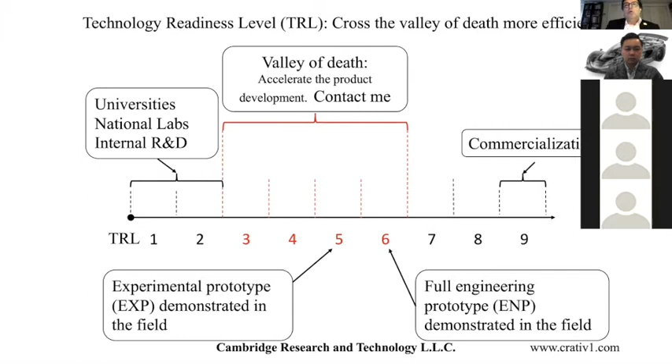Now, personally, I have had the opportunity to work on several projects in which I was able to use 3D printing. Here we have 3 cases. One was related to the design of autonomous underwater vehicles. Another one was related to gas turbines, and another one was equipment for oil and gas exploration. In the first case, I found that using 3D printing was going to allow us to reduce by almost 2/3 the length of an underwater vehicle that we were designing. And I was very surprised that at that time, about 3 years ago, we could print some components in 17-4 steel, and that was a key enabler for implementing that design.

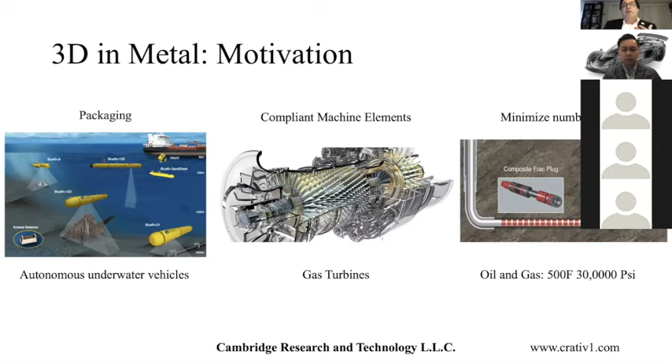In the area of gas turbines, there were a number of problems they were having, and I found that machine elements that were compliant, in the sense that they were elastic, were feasible only by using 3D printing. Feasible in the sense of manufacturing and cost. And also, I have explored the use of 3D printing for components used in oil and gas exploration that can withstand 500 Fahrenheit and 30,000 PSI. So I will leave it there, just to let you know that I have professionally worked with 3D printing, and I have found it to be a quite viable engineering solution.

Now, I just want to remark that there are 3 aspects of aluminum, which is the material that Simon will focus on today: number 1, it is abundant. It has a very high capability for being recycled, and it is both light in weight as well as strong. So Simon, you have the floor now.

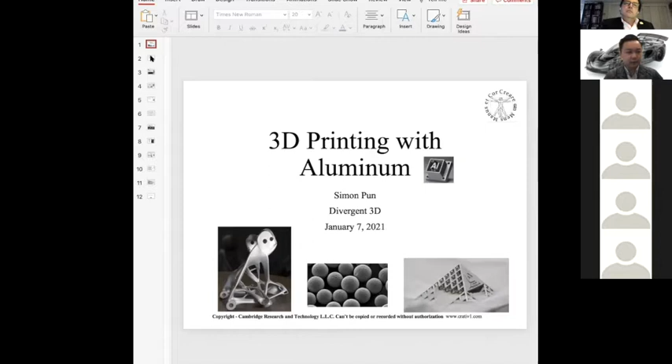You may hear me reference an article called "The Confessions of a Capital Junkie," written by Sergio Marchionne, throughout my presentation. Sergio Marchionne is the late chairman of Fiat Chrysler Automobiles, who really took a hard look at the future of manufacturing, particularly in the automotive sector. From his writing, I learned to provide upfront what the presentation is about and not about.

So here it is. The goal is to simply provide insight on the state of the art. Like Julio shared, this is a colloquium. We're among friends and the like-minded, and it's a platform for us to share. I was inspired by Sergio Marchionne to make these confessions and share with the community where I see the most pain lies. What this is not about is a sales pitch. I'm not selling anything, and I'm not trying to make a recommendation for which material or which vendor to use.

What this is really about is why aluminum is important, giving an overview of the landscape of 3D printable aluminum alloys available to the market today, and then showing a user case on proprietary aluminum alloys.

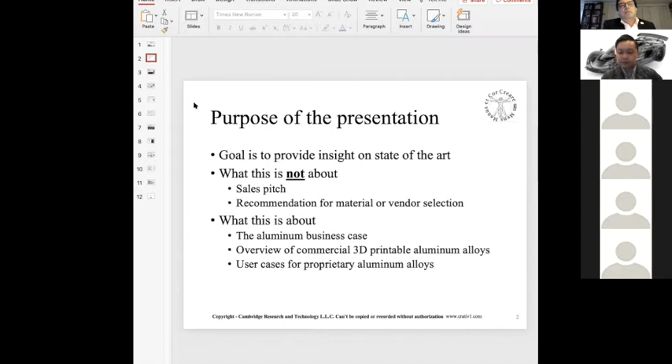So with that, shameless plug here. I understand that there will be a Q&A discussion at the end, and I'd like to be as useful as possible answering any questions. So just a brief introduction of my background. I'll start from the bottom. I became really interested in academic research even when I was an undergraduate at UC Irvine.

Eventually, I pursued a graduate degree in material science. I started out with aerospace engineering over at UC Santa Barbara, where I had an opportunity to work on new materials for a nuclear fusion reactor design. This is the tokamak. Apologize if it's too small, but the empty space looks like a donut here. So my research group was responsible for creating the first wall material, where the material sees the first reaction of the fusion. So high temperature material.

Then I actually got my first exposure, first taste of 3D printing when I was R&D staff at 3M. There I was given a third hand, if not fourth hand, binder jet printer to first fix up and make it work and print with 3M's proprietary ceramic material at the time for dental applications.

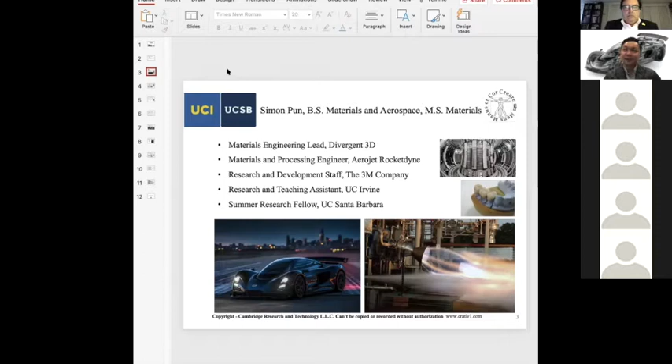The second is its recyclability. According to aluminum.org, aluminum is 100% recyclable and sustainable. A perfect example of a circular economy where we strive to achieve zero waste and minimal impact on the environment. Also, the aluminum recycling infrastructure is very well established.

Personally, I would say that the 100% recycling rhetoric from aluminum.org assumes that we'll forever be using aluminum cans. I read their life cycle analysis and why they claim 100% recyclability. The assumption is that all the scrap metal from cars, from planes, from other applications, consumer electronics, all boil down to aluminum cans, which we use for beverages and others. But the assumption is we use cans forever. Hence, it's 100% recyclable.

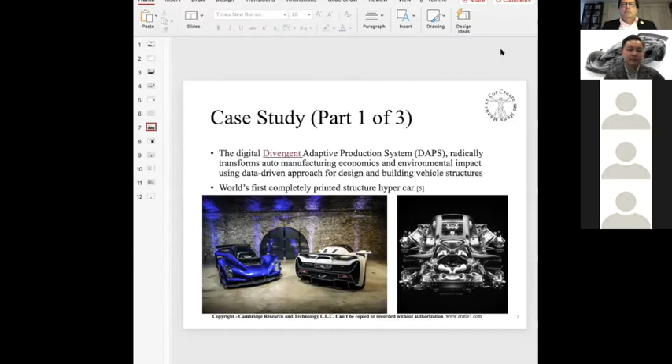What I'm most proud of is with my team, the past couple of years, we were able to work with our structural vehicle integration team to understand some of the pains that they are experiencing. So in the next slide here, I wanted to just show a quick method of what made us decide to create our own material. And in the next slide after this one, I'll show you some knowledge-based models on how we did it.

So here, the first step is to define design requirements. So we work cross-function with the auto structures team and the vehicle integration team to understand, to truly take advantage of generative design and 3D printing and be a pioneer in the field, what are some of the most attractive, and to them, the low-hanging fruit, to make us truly pioneer and proprietary. And basically, there are three requirements that we boil down to: crash-worthy.

Like I said earlier, we want to be able to 3D print a part from our printer, remove the support structures, depowder, and quickly be able to assemble that in our vehicle, in our structure. So I won't get into the specific numbers, but the high ductility, typical aluminum strength, energy absorbing for our crash bumper, our side bumper, our back bumpers. So we boiled these requirements down to a specific yield strength, tensile strength number, elongation, and energy absorption.

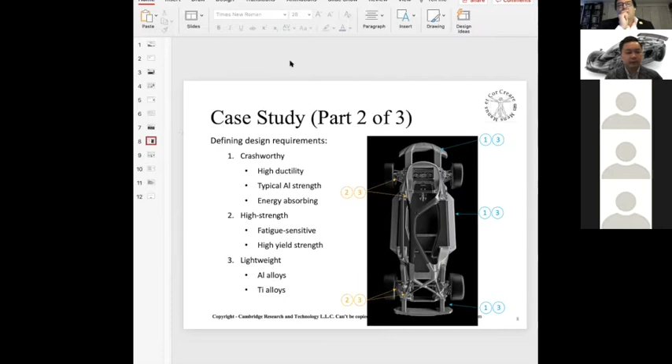We've published in 2017 that we use aluminum alloys and titanium alloys for lightweight purposes. But you might be able to guess that with our growing materials team and some of the success we've had, we're trying to go towards all aluminum, wherever it makes sense, because titanium does have a much higher stiffness than aluminum. So in some parts we may still consider titanium, but aluminum's cheaper, and in automotive, cost is very sensitive. So we're trending towards aluminum.

So a little bit of what my team did was coming up with a governing model when we're making these from-the-ground-up new materials. So let's take a high strength requirement, for example. We would build a material model and validate the model's accuracy using tested data. And then we would refine again and again until we're satisfied with the prediction accuracy. So we have here in 3 steps, creating and validating the governing model.

With this model, with our understanding, we survey the periodic table for solute elements, and then we would optimize our process parameters to first see if the material is printable, and if so, we go through a design of experiments to make sure that the parameters are producing the right microstructure that gives us our properties, and also its production rate. So going back, just looking at the governing model piece, the fundamental strengthening models are used, like solid solution strengthening, precipitation strengthening or dispersoid hardening, and grain boundary strengthening models.

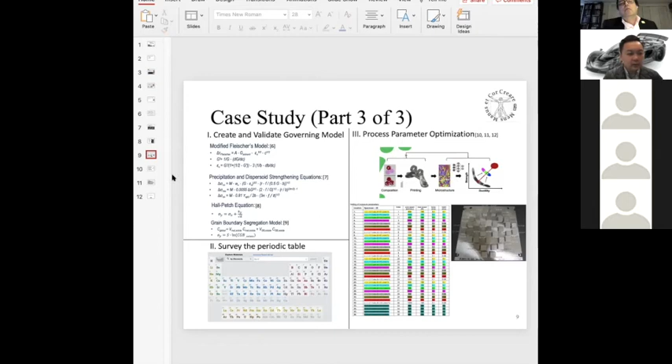So I'd like to leave the group here, before we go to open a discussion, some predictions that I have. Actually, the first one is not new. The growth of proprietary aluminum alloy development will continue in automotive for multi-material body purposes. I think the first institution that coined the idea was the Fraunhofer Institute in Germany. A long time ago, they proposed a multi-material body concept, and they actually succeeded in making some prototypes using steel and aluminum and titanium body material.

But recently we saw that Tesla also came up with their own proprietary aluminum material for die cast purposes, and their pain point was that the traditional, I think, A356, is the aluminum alloy that they were using. It's not conductive enough for them because they're EV, so they create their own. And with the adaptation of 3D printing and trend of EV, I'm predicting that there will be more of this type of activities going on. This is a patent just published by Tesla in February 2020. So we can expect to see more of this.

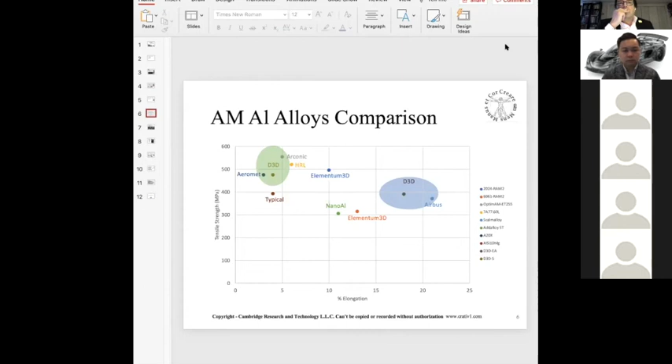But aluminum is a very big business, and now we're doing similar things to Simon's work. We were evaluating and helping the companies producing those high-strength aluminums. We develop their parameters and try to industrialize their material. It's extremely challenging. Very, very interesting. So Simon, maybe you want to share some feedback about what Yuping has just said.

Yeah. Before we were motivated to create our own material, we were also sourcing a lot from some of these startup companies that I'm showing on screen now. And there are two big, I would say, barriers. One is, like you described, process parameters were very difficult, and depending on the expertise.

I'm hearing some news in the background. Yeah, somebody has a radio.

So yeah, process parameters depend on how experienced one is with the design of experiments for aluminum. It takes some practice. It certainly was the case for us. We took a lot of practice to really hone down on the right process parameters that would suffice in terms of build speed, but also material integrity. We've found that if we want to build with a higher layer thickness, so that we can use a different cut of the particle size distribution of the powder for cost reduction purposes, we see a reduction in properties. That's generally the trend.